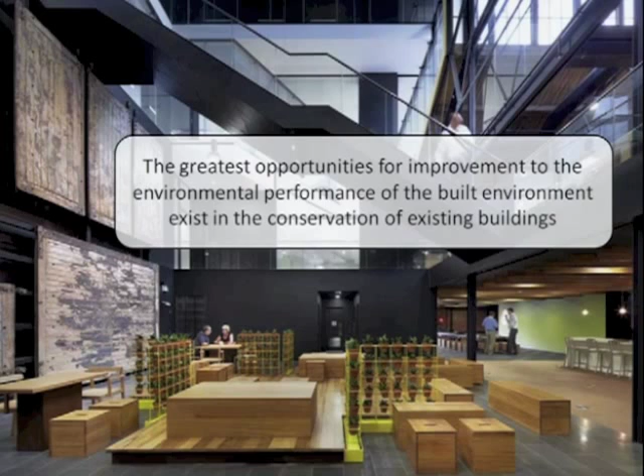One of the key resources embodied in existing buildings is energy - the energy that's gone into manufacturing the materials and systems in our buildings. There's an increasing focus on talking about embodied energy. For those who aren't aware, it's basically the energy required by all the activities associated with manufacturing and processing materials and systems in buildings, as well as the energy that goes into making the equipment required to manufacture materials and all the other services required to get buildings up and usable.

There's an increasing focus and discussion around embodied energy, as many of you will be aware. Even in things like Green Star, there's increasing talk about credits for reductions in embodied energy and so forth. Yet broadly in terms of the industry, it's rarely considered in most of our projects - it's really not discussed or included as a component of design or refurbishment.

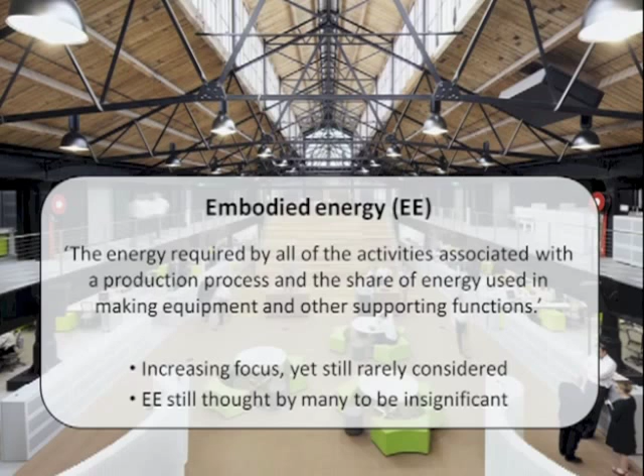One of the reasons for this is because it's considered a fairly insignificant component of the energy associated with a building over its life. Most people suggest it represents maybe 10 to 20% of the total energy required for a building over its life, and therefore we don't tend to focus on it a terrible amount. That's why we focus on improving the operational energy efficiency of our buildings, because we're more aware of that and think it represents a larger proportion of the energy associated with our buildings.

We use a range of different passive and active strategies to deal with efficiency issues and reduce energy consumption in the operation of our buildings. But there are two significant and often unthought about consequences. The first is that by reducing the operational energy requirements of our buildings, we're increasing the proportion of the embodied energy component.

Secondly, the energy efficiency solutions we're integrating into our buildings, like innovative heating and cooling systems, high-performance glazing systems, and increased insulation levels, are actually increasing the amount of materials required in our buildings, and therefore increasing the embodied energy component as well. So there are two things working against us in terms of reducing embodied energy as a result of our current focus on improving operational efficiency.

This might not be a problem if the embodied energy component of our buildings was insignificant or relatively minor. But more and more research is showing that the embodied energy component is actually the most significant component of a building's life cycle energy requirement.

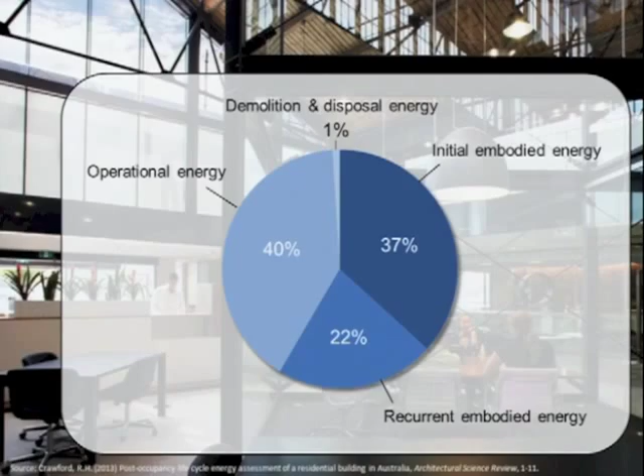So it's an area of significant and increasing interest for us to focus on. Now, there's all this talk about embodied energy as the main focus of conserving our buildings and the reason why we should conserve our existing buildings.

But we need to keep in mind that energy is not the only resource required to construct buildings. There's a whole range of other resources we require - water, other raw materials, and outputs such as waste, pollutants and other emissions like greenhouse emissions. These are all consequences of the construction of buildings, and we need to factor those in and consider them just as importantly as embodied energy - in terms of embodied water, embodied materials, embodied waste and embodied emissions. So there's a significant advantage in conserving our existing buildings because there is such a huge amount of resources embodied in the materials they're made up of.

That is made more clearly obvious by the fact that it is the components of our existing buildings that are most durable and most easily conservable that actually represent the highest proportion of their embodied energy. So the main structure, for example, represents about 40% of the total embodied energy of a building. So if we can even strip a building right back to its main substructure and superstructure, we're still conserving potentially about 40% of its embodied resources.

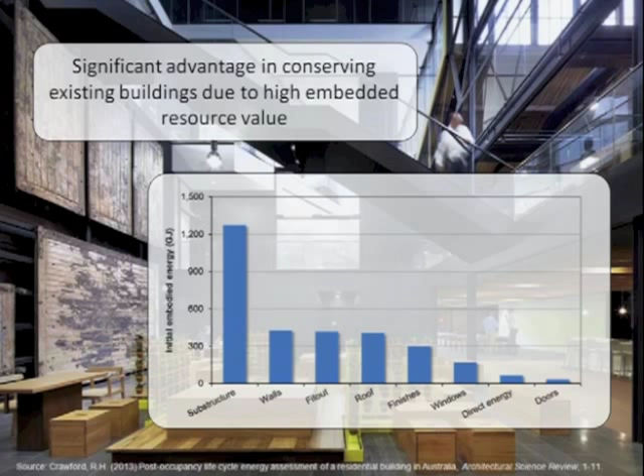So if we're able to conserve all of this energy and all these resources by conserving our existing buildings, we're potentially already saving some embodied resources by not building a new building.

We've got to also consider the fact that there may be particular limitations associated with our existing buildings that mean we're not able to achieve the operational efficiencies that might be possible with a new building, in terms of glazing areas, external materials of existing buildings, and things like that.

And we've got to balance the saving in embodied resources with a potential decrease in operational performance across the life of these buildings. So we need to determine or make sure that there's actually a net benefit being achieved by conserving our buildings. And there won't be a net benefit in every case.

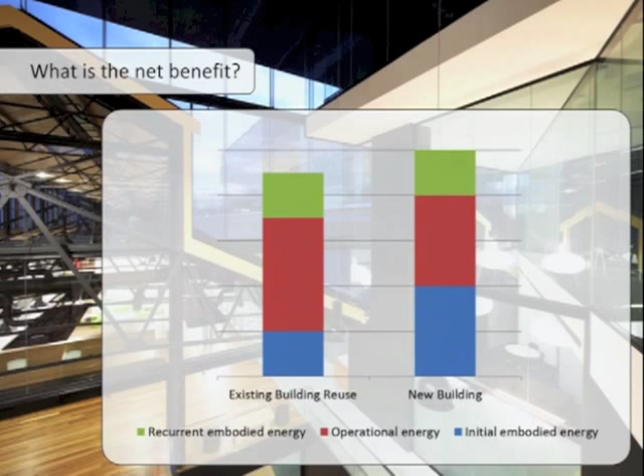We've got accepted approaches for quantifying and modelling the operational performance of our buildings. But the modelling and quantification of the embodied resources of our buildings is much less developed and less understood. So there's a lot more work that needs to be done in that area in particular.

So then how do we go about quantifying these resource savings, potential resource savings from the conservation of our existing buildings? Now that we know they are and they can be significant, the approach that we typically use in the field of life cycle assessment is embodied resource analysis. So if we're quantifying embodied energy, it's embodied energy analysis, or embodied water analysis for water. A general term might be embodied resource analysis.

So we can actually quantify the embodied resources that go into constructing or refurbishing a building. This approach comes under the general framework of life cycle assessment that many of you may have already heard of. The framework is outlined within the International Standards 14040 series, which basically sets out some guidelines for how to conduct a life cycle assessment, or as a streamlined form of life cycle assessment, an embodied resource analysis or embodied energy or water analysis.

These types of analysis are based on material-specific resource coefficients. So, for example, in terms of embodied energy, we will have a quantity of energy that is required to produce a certain amount of material. So, gigajoules of energy are required to produce a cubic metre of concrete. And we can model the embodied resource of a building by determining the quantity of materials in each building.

As a result of that, we get a sum of the total quantity of resources that have gone into manufacturing or producing a building, and also the outputs that are produced as a result of that in terms of waste, in terms of emissions.

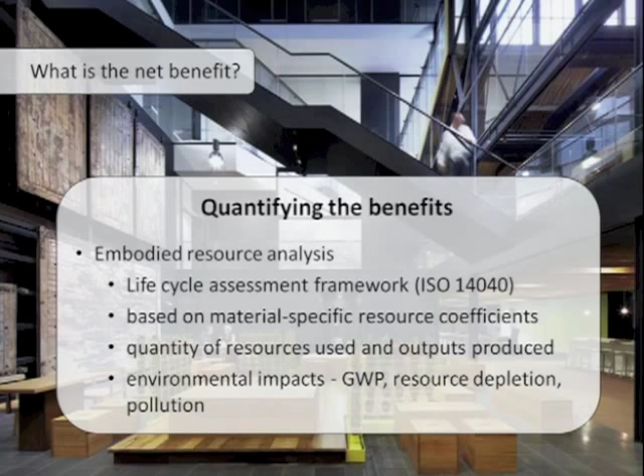And as an aside to that, or a continuation of that, we can then look at the environmental impact associated with that, because energy isn't necessarily energy. Different forms of energy result in different environmental impacts. And we can use this life cycle assessment approach to quantify the global warming potential, or the potential for resource depletion, or other pollution that might result from the construction of our buildings.

Now, the most common, or one way of actually quantifying the potential resource savings from the conservation of existing buildings, is to model the resources that are embodied in those existing buildings.

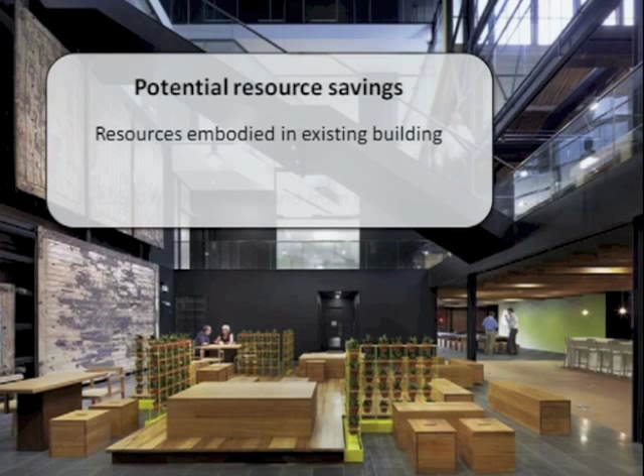Now, the issue with that is that the resources that were required to construct existing buildings, potentially decades or centuries ago, is different than the quantity of resources that would be required to replace that building now, based on newer and different manufacturing processes, more efficient manufacturing processes potentially, different materials and different ways of construction. So that's not the most ideal way of quantifying the potential resource savings associated with conserving our existing buildings.

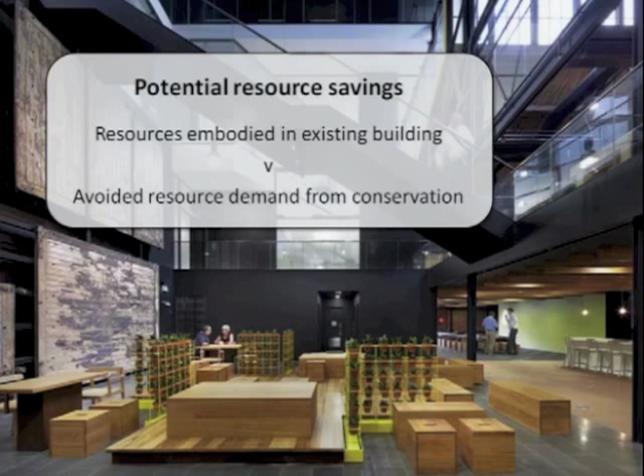The preferred approach is to look at the avoided resources associated with conserving and continuing to use our existing buildings. So what's the resources saved by not having to build a new building compared to keeping the existing one? In order to do that, we need to quantify the embodied resources in an alternative new building for the same function and similar size.

I've just demonstrated how we might do that. From that, we need to subtract any additional embodied resources required to make good the existing building. In most cases there will be upgrades needed for the existing building to bring it in line, not only in terms of physical appearance, but also structural integrity, functional, thermal, health and safety requirements to comply with current expectations and building regulations. So we need to subtract that from the potential resource saving.

There might also be additional operational resources required for an existing building compared to an alternative new building, because of potential limitations on existing buildings in getting their operational efficiency up to what might be possible with a brand new building.

So what I want to focus on now is some of the strategies for and things to think about when we're assessing the embodied resources in a new building, because that's important to understand when we're trying to quantify the savings expected from conserving our existing buildings.

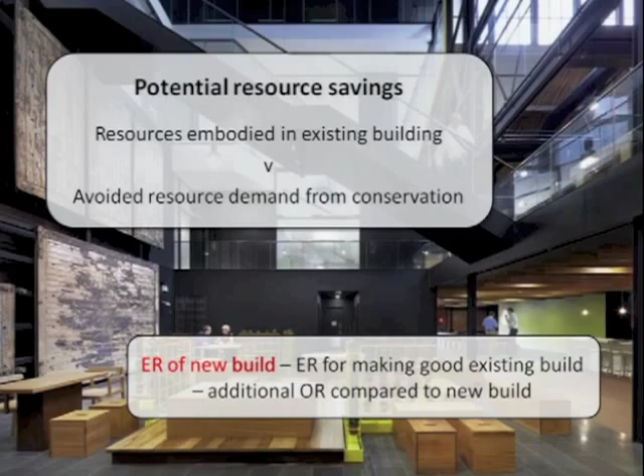Just to give you an idea of some general figures around how much energy is embodied in buildings, we're looking at around 10 to 20 gigajoules per square metre for residential buildings, slightly more for commercial buildings, just because of greater structural and servicing requirements.

Gigajoules doesn't mean a lot to a lot of people. For a typical detached average size house in Australia these days, around 240 square metres, we're looking at around 4,000 gigajoules of energy for one house. That's about the energy content of 500 barrels of oil, or the amount of fuel required to drive around Australia 35 times. So a significant amount of energy in one house.

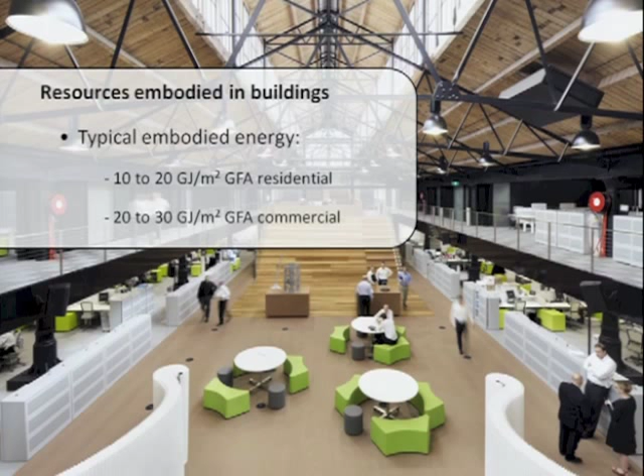We can also look at the embodied water of our buildings. From a residential point of view, you're looking at around 15 kilolitres of water per square metre on average. For commercial, a bit more again, for the reasons mentioned before. To give you a better idea, you'd need to fill a building up between 5 to 10 times with water to equate to the embodied water in that building, before we even get to using the building and consuming water for operational purposes.

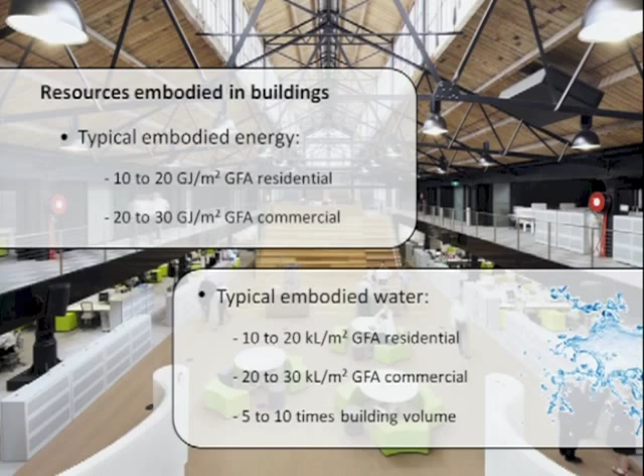There are some general rules of thumb we can think about when quantifying or assessing the embodied resources in our buildings, and also looking at strategies for minimising those resources. As I mentioned before, the building structure typically represents about 40% of the total embodied resources. The construction process itself is typically less than 5% of the total. So trying to minimise energy consumption on site in terms of power tools, cranes and so on has little impact on the total embodied resource requirement.

Road transportation is about 4 times more emissions intensive than shipping. So in some cases it may actually be more worthwhile environmentally to import materials from overseas than obtain them locally, depending on travel distances. However, transportation requirements associated with the embodied resource content of buildings are typically less than 5% of the total overall resource requirement, so it's not a significant area to focus on.

Reusing and recycling materials is also a good strategy for minimising the embodied resource content of buildings. You can save up to about 95% of the embodied resources associated with construction if you're reusing materials, and 90% with recycling materials, depending on the extent of making good and the source of those materials in terms of transportation energy required.

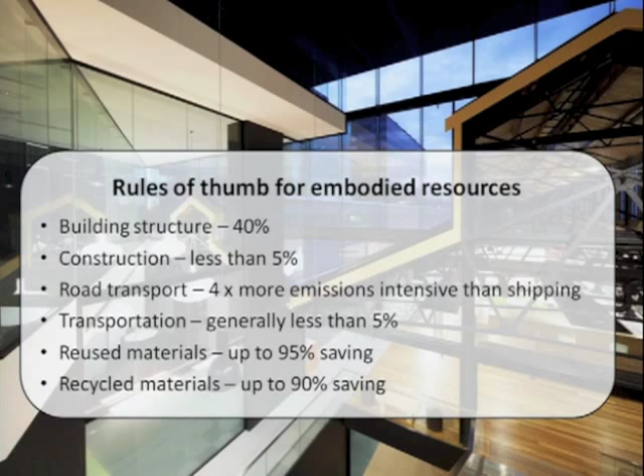So we're developing a greater understanding of the embodied resources in buildings, how to quantify them and how to minimise them. But there are still major challenges remaining. One of the major challenges is data, both in terms of access and quality. It's extremely difficult to get access to quality data because manufacturers are often reluctant to release it for various reasons. By the time we get access to it, data is often out of date and potentially decades old, which doesn't necessarily relate to current practice and current production techniques for materials.

The reliability and completeness of data is also an issue, particularly where we are not able to capture all of the resource requirements associated with manufacturing particular materials, because it's too time-consuming and too complex. So we tend to limit the scope of that data collection exercise to what we think is the most important processes in manufacturing particular materials.

The geographic relevance is also a really critical one. Most of the tools available in Australia at the moment for quantifying embodied resources rely on overseas data. That overseas data doesn't necessarily reflect Australian production techniques and processes and the resource requirements associated with Australian produced materials.

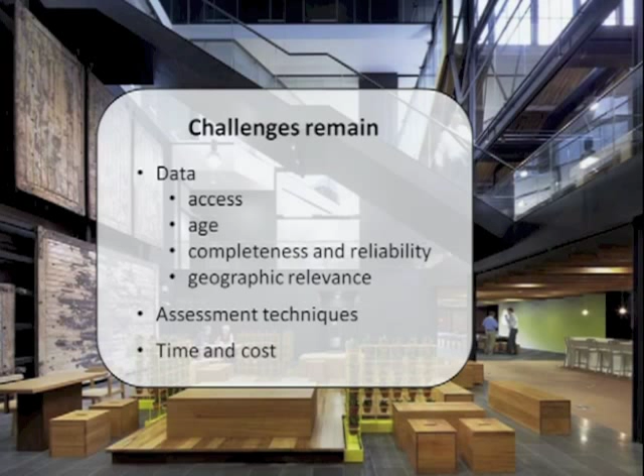There are issues with assessment techniques in terms of their complexity, but also their limitations, and many of them are actually flawed - I won't go into that in detail at the moment. And the time and cost involved is also substantial in a lot of cases. It can be extremely time-consuming to conduct a full LCA or a full embodied resource analysis of a whole building, and because of that can be quite costly. It can take months and months to do that, and it's not something that's going to be done on every single project.

So in summary, what I've hopefully got across to you today is that the embodied resource value in our buildings is significant, and a lot more significant than most of you probably already thought. So therefore, maximising the value of these embodied resources is absolutely critical in terms of conserving and protecting the environment and reducing the resource requirements that we have from the environment.

We also need to take a whole-of-life approach, because it's no longer acceptable, and it's often misleading, to focus on one aspect of a building's life cycle, such as the operational performance of a building. We need to factor in the embodied energy associated with buildings, but also the ongoing embodied energy associated with replacing materials over their life. Sometimes it might not actually be beneficial to conserve our buildings, particularly if there are significant operational efficiency reductions associated with those buildings, and not a substantial reduction in embodied resource requirements because of the conservation of that building.

This seminar is focused on heritage buildings, but I think the bigger discussion is around existing buildings, because heritage, particularly heritage listed buildings, represent only a small proportion of our building stock. And in a way, heritage listed buildings are much easier to deal with, because we're limited and often restricted in terms of keeping them as they are. So it's not as complex and difficult a decision to make as it is with all of our other existing buildings, where the decision to pull them down can come a lot easier, as a lot less controversial decision in a lot of cases.

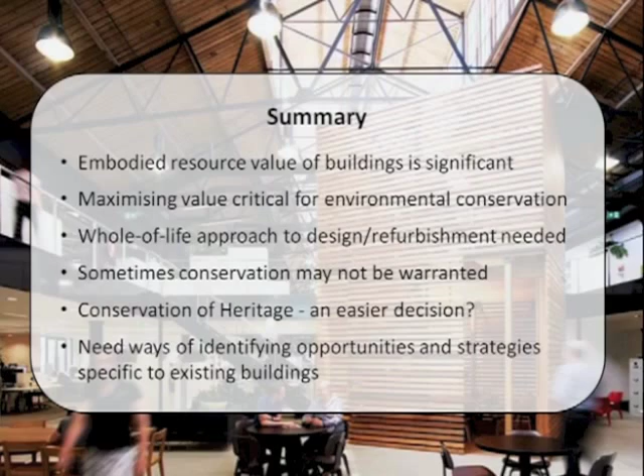So our next speaker is Noy Hildebrand. Noy is editor of the Australian Institute of Architects Environment Design Guide. She's a registered architect in the United States and a sustainability consultant trained in a range of systems: the Living Building Challenge, the Bioregional One Planet Sustainability, LEED and Green Star. Noy has worked on medium and large buildings in Australia and abroad, and her areas of expertise include high-performance building design and the interaction of facades with natural ventilation. Noy's topic today is heritage buildings and environmental response.

Good morning. Thank you for inviting me here today, Robert. And it's funny that I go after you, because my talk actually has to do with operational energy and the unique characteristics of heritage buildings.

So yes, as Justine said, I edit the Environment Design Guide. EDGE is an online publication of the Australian Institute of Architects. EDGE has over 200 peer-reviewed design notes, which cover various aspects of sustainability in the built environment. And while some of the material can be a bit technical and theoretical, the target audience is primarily architects and designers of the built environment.

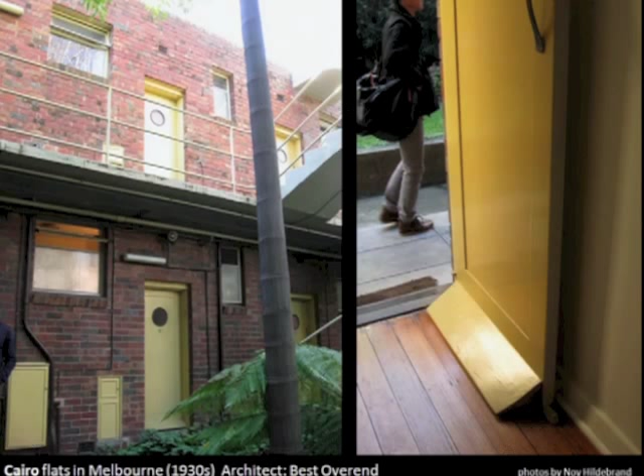So after I put these slides together, I realized I didn't bring the prettiest images of Cairo Flats, but oh well. So this is Cairo Flats in Melbourne, designed and built in the 1930s by Best Overend.

These minimum flats with maximum comfort have very interesting openings that face the cantilevered corridors, which are those on the left. The front door of the apartments has a splash guard detail, probably designed to keep rain out and away from the door sill.

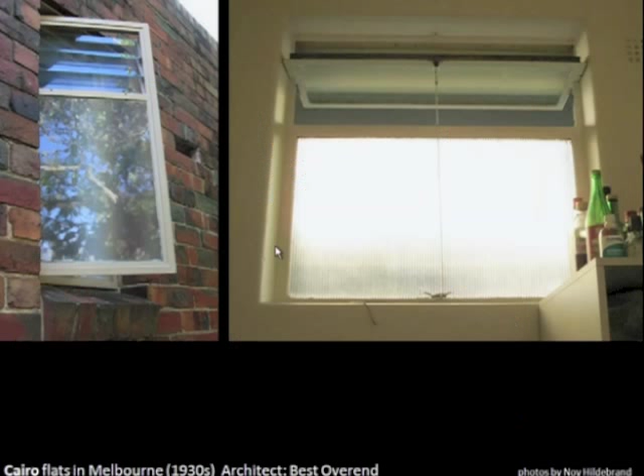The next are the bathroom and kitchen windows—this is the kitchen window, and this is the bathroom window. They're both elevated so as to assist with privacy and security concerns.

The bathroom window has a lower part of the sash which allows for daylight but obscures view for privacy, while the upper glazed louvers allow a view of the sky and a moderate level of exhaust. The whole thing is mounted on a casement window sash, which can fully open for an even higher level of exhaust.

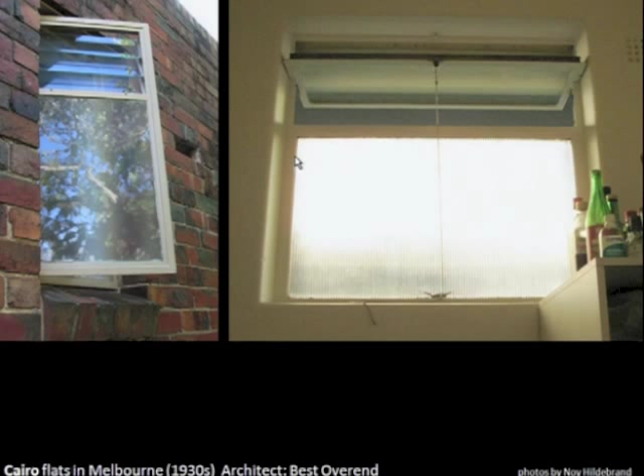The next one is a kitchen window, which again has that obscured pane with the upper level open for exhaust and, in some cases, for views out.

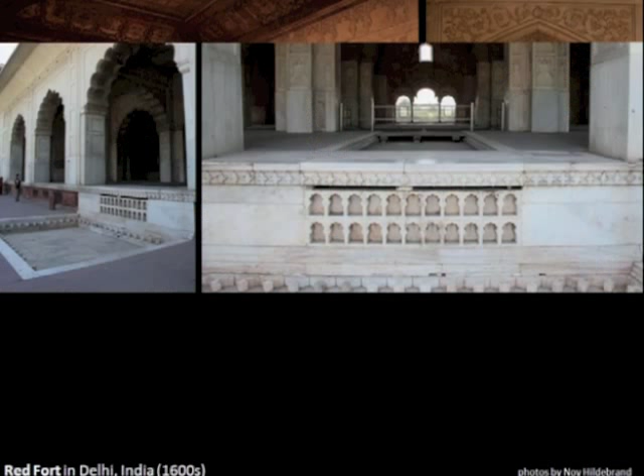This next example is Red Fort in Delhi, India, which is in some ways very similar to Agra Fort. It also has screen walls in some locations, but in addition, the breezeways that the screen walls allow for are coupled with shallow pools and a waterfall, which help with evaporative cooling in the hot, dry climate.

It's worth noting that the carved screens and the water features are integrated into the architecture. They provide pleasant aesthetic and a cooling function for these places.

The final case study is the dome building at the State Library of Victoria from 1909 to 1913, by Bates, Peebles, and Smart. As with buildings of this era, the dome reading room was designed and built at a time when architects designed buildings to harvest daylight and naturally ventilate.

For this talk, I'll be focusing on the dome reading room in terms of daylight. How the light was brought in to be usable was a skill characteristic to the culture of architectural practice at that time. In much of the world, electricity was not always consistently available, as it seems to be in our own time, and daylight was a key reliable resource.

Combustion-based lamps were available, but they create fumes, and fire and books don't really go together. This influenced how architects designed buildings and spaces. They had to make a concerted effort to light spaces for working, for reading, and for visual legibility.

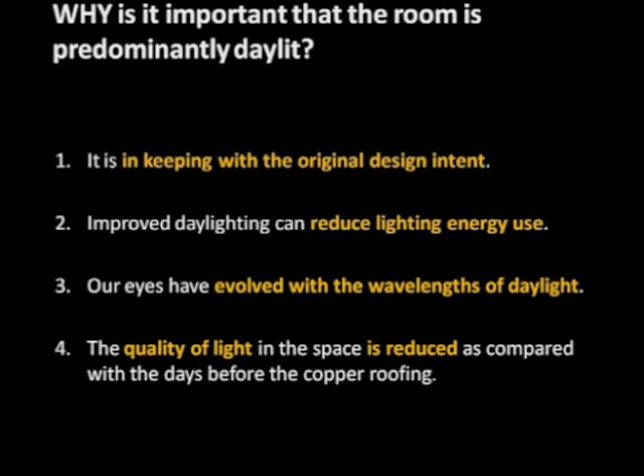The ground in the space feels somehow less connected to the sky. The occupant seems less connected to the outside world. It's harder to sense where the sun is and what the sky is doing. The architectural space is performing more like any other big room that happens to have a skylight.

This is not to say that the reading room should necessarily revert back to its 1913 lighting schedule. Electric lighting has its place, such as during heavily overcast skies, and at night, of course. The room with a skylight is no doubt a huge improvement to the room without, but if we truly value natural light, as we say we do, why do we persist in competing with it rather than working with it?

I, for one, hope for a less energy-hungry dome reading room one day, where the daylight is sufficient for ambient illumination and reading, when conditions permit, and where electric lighting can be used when needed or desired, rather than by default as it is now.

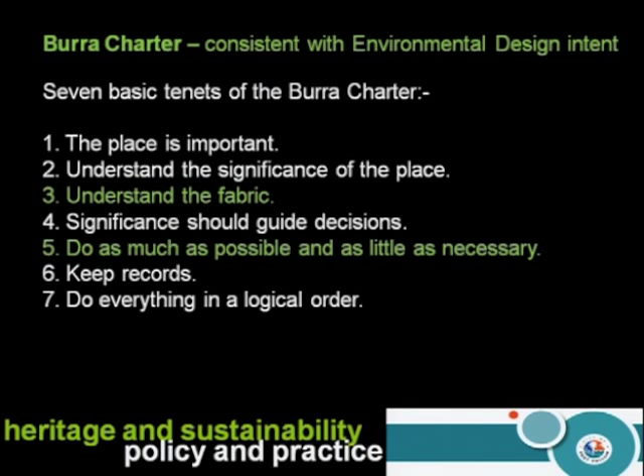Just giving you some background as to Port Phillip's approach and where we have aimed and are aiming to get to, and that will constantly be being looked at.

To give you some context of Port Phillip itself, a very large amount of the municipality is covered by heritage overlay, and therefore this issue is a definitive one in terms of certainly my experience in working with applicants and their designers.

Council itself appreciates the need to address both of these, and has certainly in the last 10 or so years made a very strong commitment to working towards sustainable outcomes from the built environment.

Council now have started off with 2 dedicated advisors, and I work with a sustainable colleague in how we assess applications in this field.

The urban design and sustainability issues within the department have grown over time, and that sustainability team, which was quite small about 10 to 12 years ago, now consists of 17 staff, across the whole sustainability area - so I'm talking about sustainable transport planners as well.

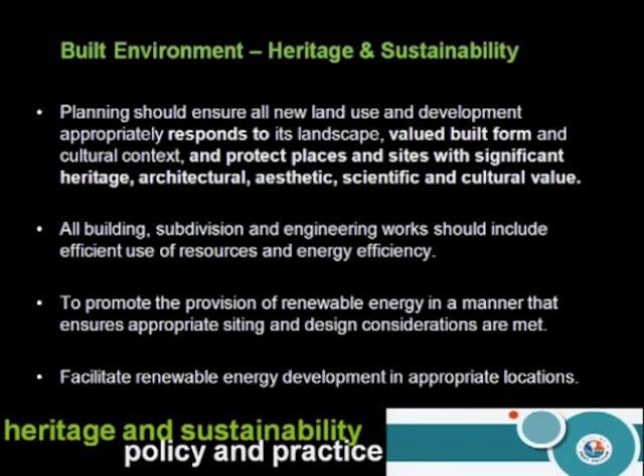I'll quickly go through some of these five key issues within our heritage guidelines, and towards the end I'll show you some of the work we're seeking to get out to the community.

Just touching quickly on the built envelope and how we take advantage of solar access, building fabric, and some of these elements within the heritage fabric that we clearly need to address - we've heard some of the benefits of these elements, i.e. windows, the performance of the glazing.

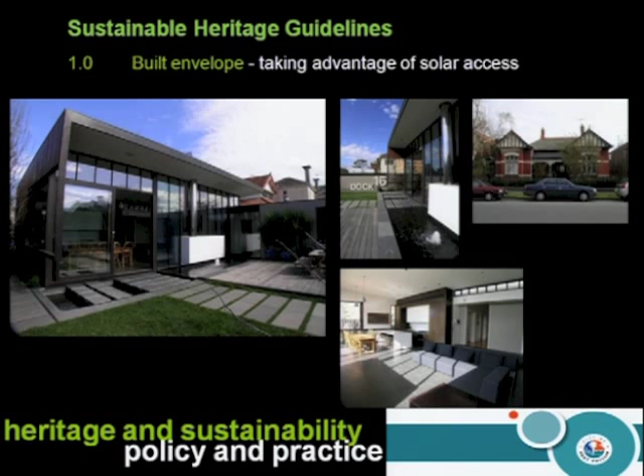So yes, it's an example of the heritage fabric within Port Phillip, illustrating how you can retain that heritage character and accommodate new accommodation to the rear of the dwelling, maximising on a number of those sustainable issues - in this case, taking advantage of the solar access, and again, use of building fabric.

The Tolarno Hotel, renovated not so long ago in Fitzroy Street, again shows the use of retaining built fabric, but bringing it up to today's standards while equally hitting some of those sustainable benchmarks.

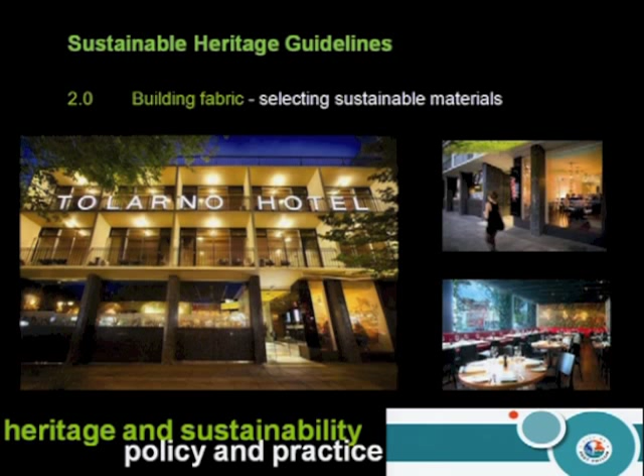Windows, and we've talked about performance of glazing. There are other things within the streetscape that can also assist, such as verandas. They're all something that needs to be assessed in that fashion.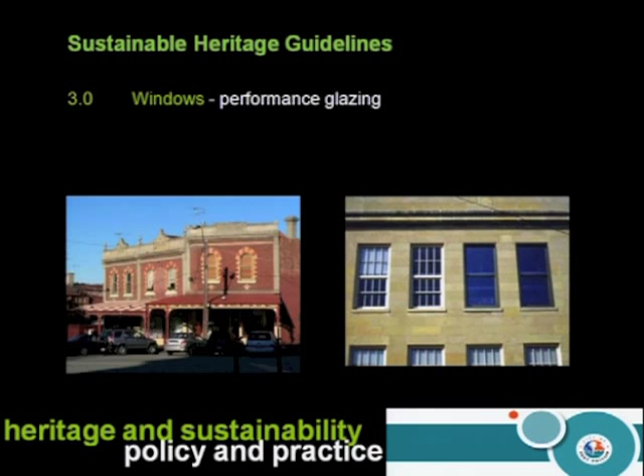Moving on, here's the example of verandas and window restoration. Most recently, I had an application where they were happy to retain the windows, but it wasn't a veranda as elaborate as this, and they actually wanted to remove it. Ironically, there was this concern that they weren't getting enough daylight, and it really was about looking at how you could retain the veranda but improve the lighting within the building.

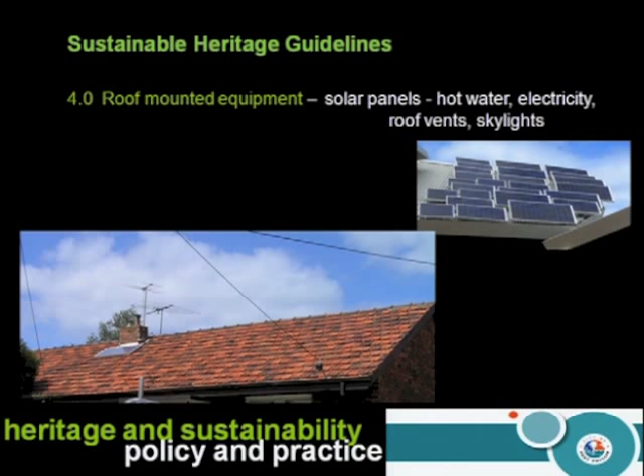The one I'll touch on very briefly later, but very soon, is this issue of solar panels. Clearly this is one of Port Phillip's greatest percentage of applications - solar panels that we're receiving a number of applications for, but on a lot of heritage buildings within the municipality.

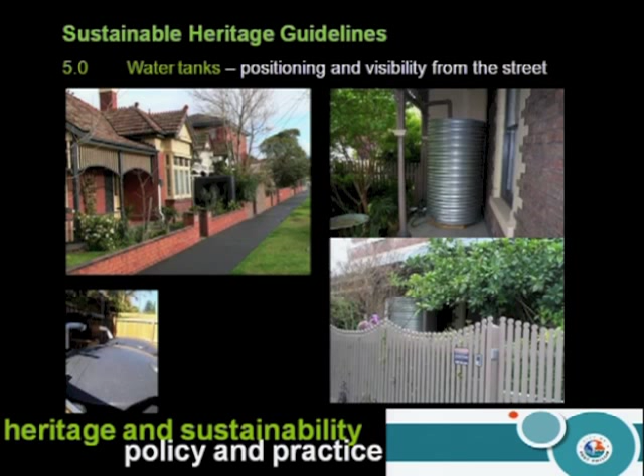I probably should have swapped these two slides around, but then, as I mentioned earlier, water tanks. The issue here was actually siting of the water tank. Some properties are just difficult to screen or hide them, particularly a corner property. The example here was where they actually wanted to stick it right on the veranda or in the front garden, and we worked with them to find a better location.

Now, just quickly, I'll illustrate the case study within Garden City Estate, Port Melbourne, a listed estate, one of Melbourne's first historic estates, public housing of significant importance in Victoria's history. Given the layout and design of the practice at the time, it's one that was really important to protect and conserve. Part of the design element or characteristic is hipped roofs and gabled roofs with terracotta tiling, those being key to that fabric.

But then how do you address a resident who wants to put solar panels on a house in an estate of such importance? Again, it's an issue of orientation - not all roof slopes face the sun, and the sun moves. So, quite frankly, it is difficult. But again, with assessment and this ongoing discussion, it can be achieved.

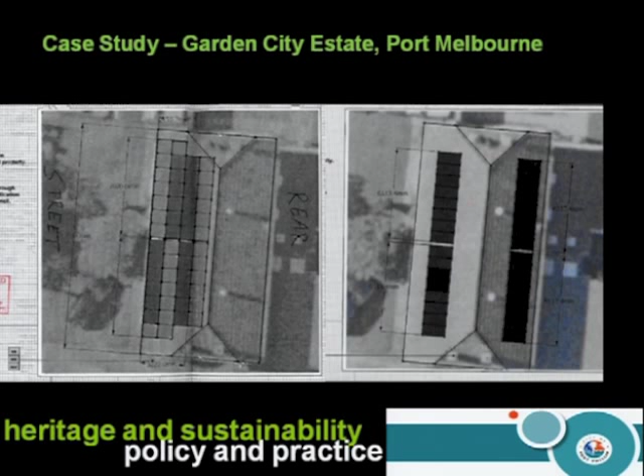So we worked with the applicant to look at another system, and ironically, by the time this application came in, while we were having this discussion, this particular manufacturer stopped making this type of panel. So the applicant had to find another manufacturer. The other manufacturer came up with a slightly different panel, less in quantity, and even addressed in his assessment the need in this case to put it on both slopes of the roof, illustrated on the right hand side.

Now, council - and then the last iteration, which came in a third time, had actually gone from a bit less to now a bit more, but not as much as before. So it was going all over the place.

Having said that, what we, with our sustainable development team, sought to address with this particular applicant was other ways of improving energy efficiency in the home. He saw solar panels as the sole factor for him in addressing energy. We said there are a number of other things you could do, and we'll work with you to achieve that, and therefore minimise the amount of panels you may need, and place them in more suitable locations that would address the heritage policy as well.

Sadly, he didn't take that on board. He never got refused his application, but he had a condition which meant he couldn't put it on the street-facing roof slope. He took us to VCAT and argued that a panel should be seen similarly to a TV aerial, which VCAT, the member decided, no - unless the planning scheme puts solar panels in the same list as satellite dishes and TV aerials, he wasn't going to entertain that argument. So subsequently, he got a permit for solar panels, but just not as many, and in the location proposed. He's now seeking to take us to a higher court on human rights issues.

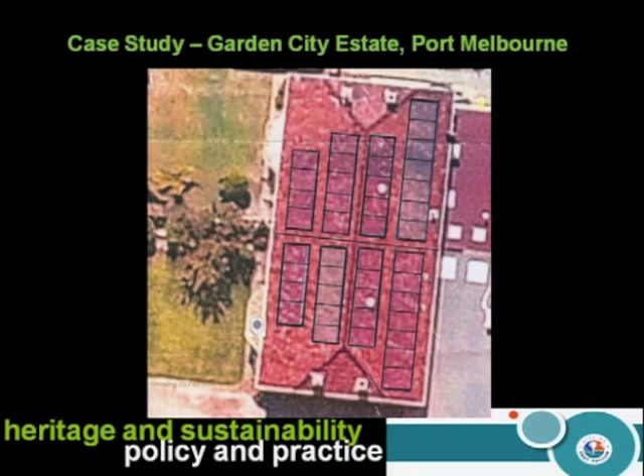That's something we could talk about later if you like. Having said that, it's important to place these things in appropriate locations. It's not to say they cannot or should not be visible from the street. It's really about how you minimise the impacts.

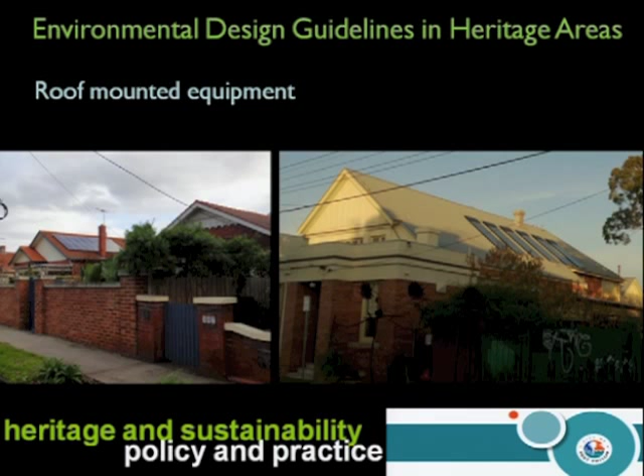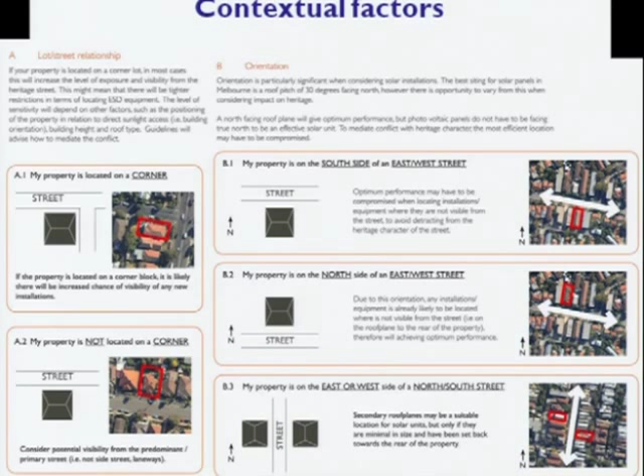Just to quickly illustrate the sort of guidance that we're seeking to produce for the general public and the community, just to have that conversation as to where the best location might be. I've just illustrated the one for solar panels. We have a range of these fact sheets dealing with a number of those other elements that I illustrated earlier.

We also produce a number of fact sheets to do with SDAPP, and we've been working in the IMAP Council, which is Melbourne's inner urban councils, to come up with guidance that is relevant to all councils. After all, council boundaries are just lines on a map, but our urban environment and inner urban Melbourne is seen as one significant part of Melbourne and Victoria's heritage.

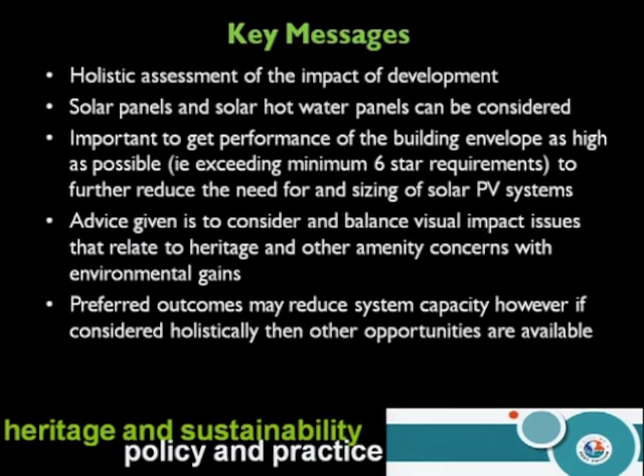He's Professor of Construction and Facilities Management at the Institute of Sustainable Development and Architecture at Bond University. Craig's work spans issues of sustainable development, building adaptation, multi-criteria decision-making, one of the topics of Leon's talk, and construction performance. He's the author of 5 books and has completed 4 ARC-funded research projects. Craig's topic today is Green Adaptive Reuse, Enviro Heritage. So, please welcome Craig.

Well, good morning, everyone. I'm Craig, and I'm from Queensland. As you can probably gather, I've got the sunglasses and the jumper coming down to Melbourne, so I should get rid of all of these things, and I'll try and be a Melbourneite for just a few minutes. I don't, but I'm thinking you might.

My talk, as Justine mentioned, is on green adaptive reuse, which many of you might say, well, isn't all adaptive reuse green? And I think the answer is yes. But the intention in my talk is really about how we can improve work on existing buildings and heritage-listed buildings by incorporating environmental performance as part of that adaptation. So green adaptive reuse is a term I've coined to highlight the fact that environmental performance and adaptive reuse are not mutually exclusive.

So I did a little analysis on the LEED directory of projects that have been certified as platinum in the US. Platinum is really the equivalent of our Green Star 6-star in Australia. And what I found, a little bit to my surprise, was that only 5% of projects that have been approved as platinum are adaptive reuse projects. The remainder are either renovations to projects that are the same function or, in fact, new buildings.

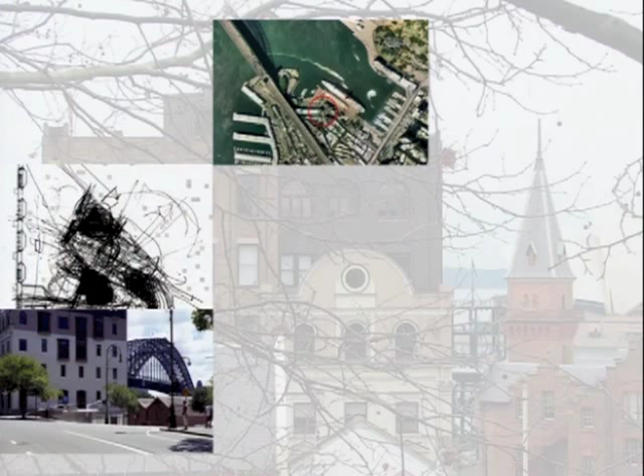So here are some photographs of the building from the architect's website, and you can see instantly that the building is in a very good location. It has views of the Opera House in Sydney and the Harbour Bridge. It sits pretty much on the foreshore of Sydney Harbour. It has beautiful windows and fenestrations to the views, capturing natural light and natural ventilation opportunities, etc. And as Robert pointed out in his talk earlier, there's a lot to be gained from adaptive reuse when we look at existing buildings over new buildings, and this would be a great example of that as well.

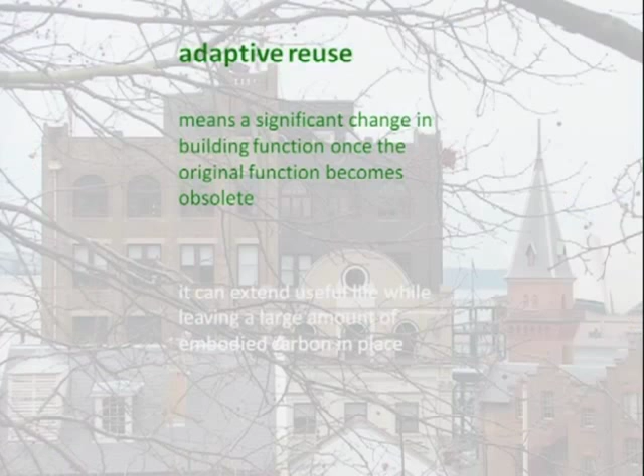So adaptive reuse means a significant change in function. That's its definition. So what we're looking at is taking an industrial building and converting it to an office building or some other, quite different function from what it started as. It can extend the useful life of the building when that happens, assuming the existing function had become obsolete. Rather than knock the building down or leave it derelict if it's protected and no one wants it, it's about how we can give it new life through a change in function.

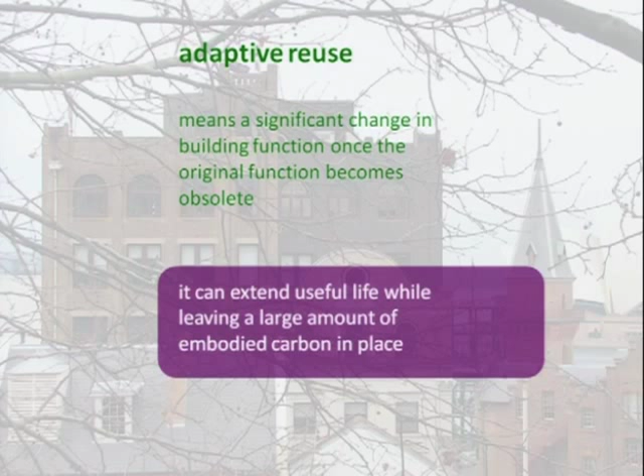So I've been working on a number of models over the years, and I'm going to talk about three of them briefly today. The first one is called the ARP model, or Adaptive Reuse Potential Model. What it does is it ranks the potential for adaptive reuse in existing buildings and identifies the optimum time when you should intervene to change function.

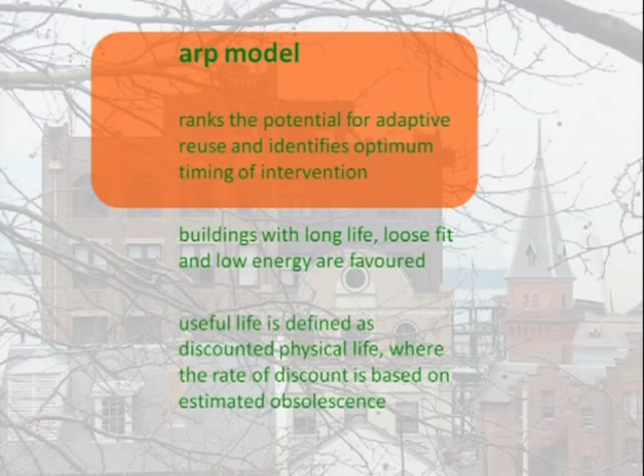It works on a principle which a lot of you, I'm sure, would be aware of, that buildings should have long life, loose fit and low energy as principles of their design. And the way the model works, useful life is defined as discounted physical life, much like a discounted cash flow might convert money from one point in time to another. And it uses an estimated rate of obsolescence as the discount rate.

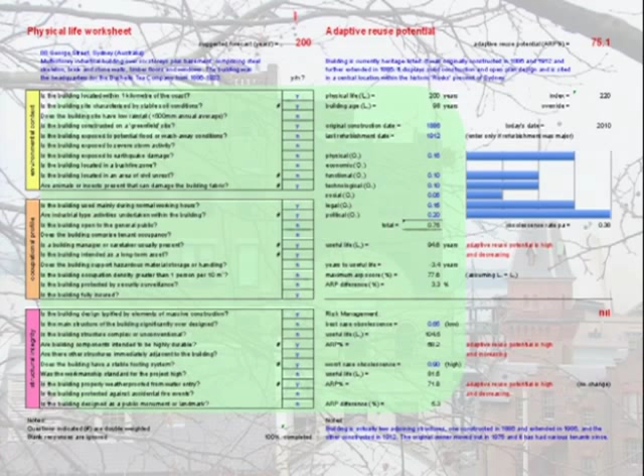Okay, just draw your attention to the fact that it forecasts the life of the building in this model, and the answer it comes up with is 200 years of life. This study was done when it was just around 120-odd years of life, so it had potentially 40% of its life left. And that's worked out on a simple, well, not so simple actually, it's a bit of expertise built into what looks like a simple calculation where you answer yes or no to a series of questions and it tells you the answer.

I'd have to spend a bit more time than I have to explain how that works. But nevertheless, once you have that, it then calculates an obsolescence rate, which comes from these areas here. So there are 7 obsolescence categories, which are scored. And it comes up with an adaptive reuse potential score, in this case 75.1.

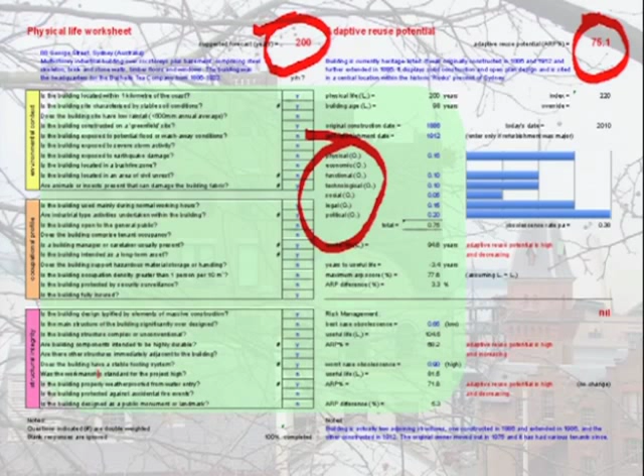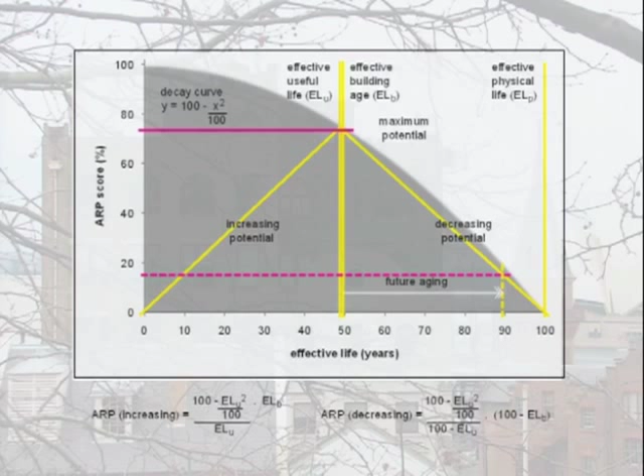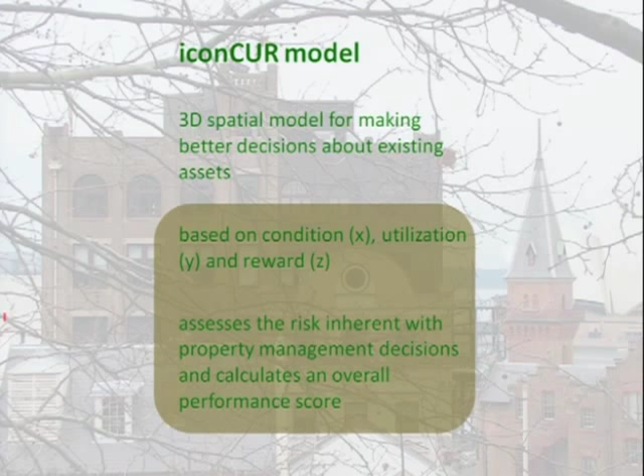The second model I want to talk about is called iconCUR, and I've worked with an excellent group of people, including Robert Crawford, on this project over the last 3 or 4 years. We've just finished our conclusions in the last few months. iconCUR is a 3D model, like a cube, with X, Y and Z axes. X means the condition of the building, Y means the utilisation of the space within the building, and Z means the reward, triple bottom line reward that comes from the building upon its completion. This model is useful for judging and comparing different choices in adapting existing buildings. It's just another seemingly simple spreadsheet model, but a little bit going on in the background.

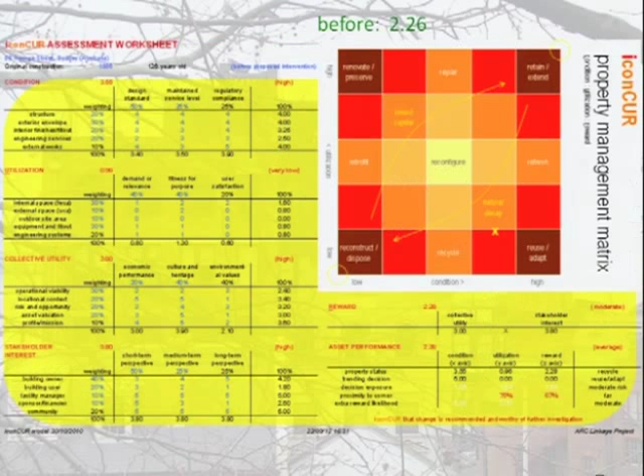If you notice the graphic in the top right-hand corner, this is the base of the cube, and it shows 4 corners. One is to reconstruct or dispose of your asset. Another is to renovate and preserve, retain and extend, and another is to reuse and adapt. On this particular project, the X shown here is the position of the coordinates after it was assessed, before the intervention. The distance of that point to the nearest corner tells you what you should do. In this case, it was saying this building is suitable for reuse. The actual distance of that X to that corner can be measured and used to rank various projects in terms of which has more potential for that action than others.

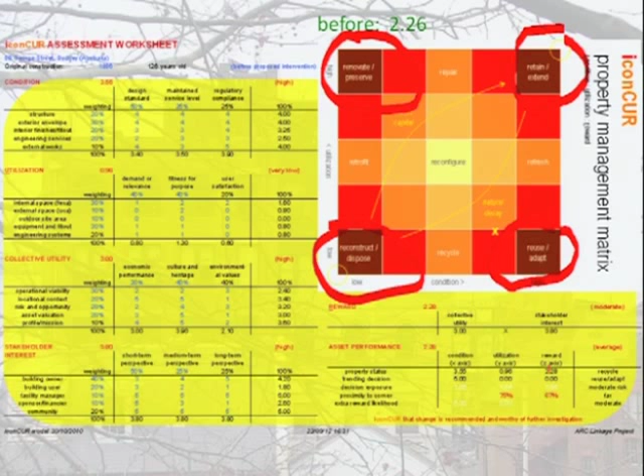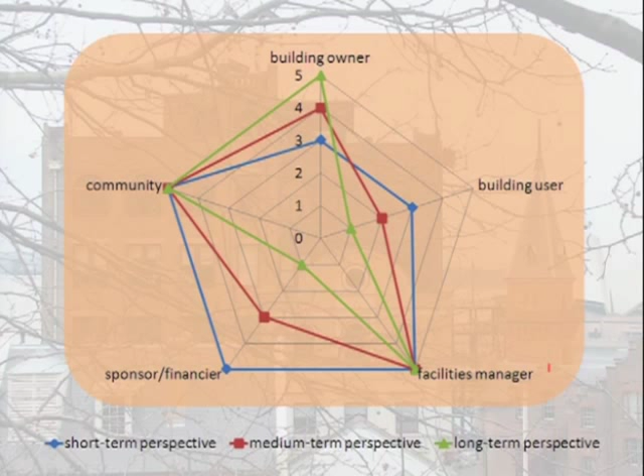We can also look at things like the various stakeholders involved in the project and whether they have short-term, medium-term, or long-term interests. There's a lot of analysis that can come from this model by digging down and thinking about it further. After the intervention, the calculation was repeated, and you can see that the X moved closer to the retain, extend corner of the model, which indicates we've made this asset something we want to keep, whereas before it was perhaps something that needed work. The score went up, I think, from 2 point something to 3.32 as a result of that.

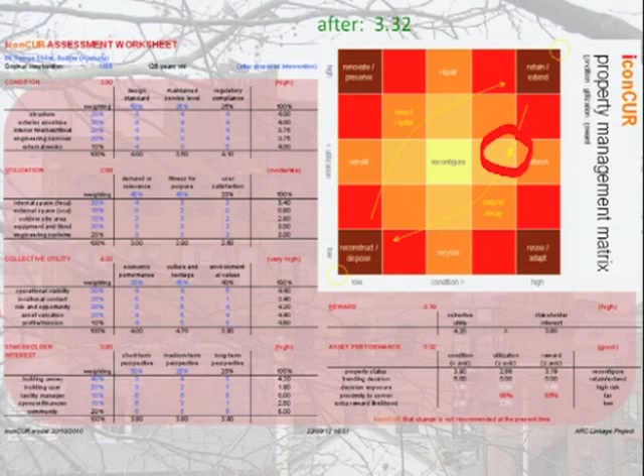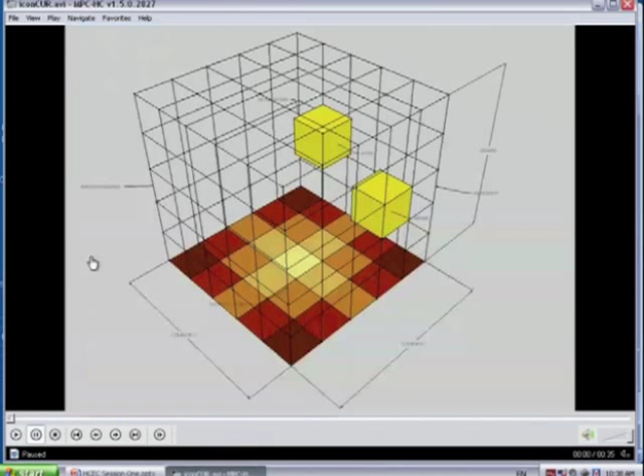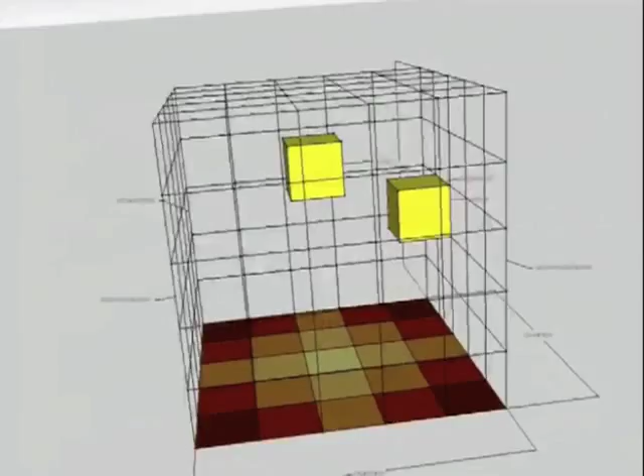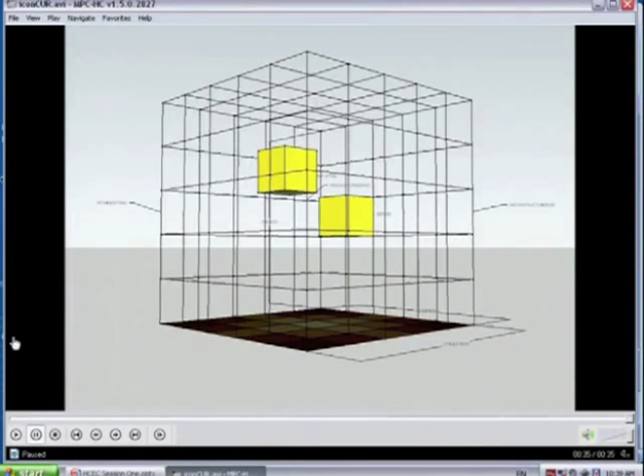This slide is a little video of the iconCUR model. It's a 3D model, 5 by 5 by 5 cube, and you can see 2 large dots in the model, one the before and one the after. As a result of the intervention, adaptive reuse, the project improved its status and moved higher towards the retain, extend side of the cube. The higher up in the cube, the more valuable the project has become. So you'd want to make sure that after your intervention, what you're left with is higher in altitude in the cube than what you started with, and also that it's closer to the correct corner to maintain and keep. Thank you very much.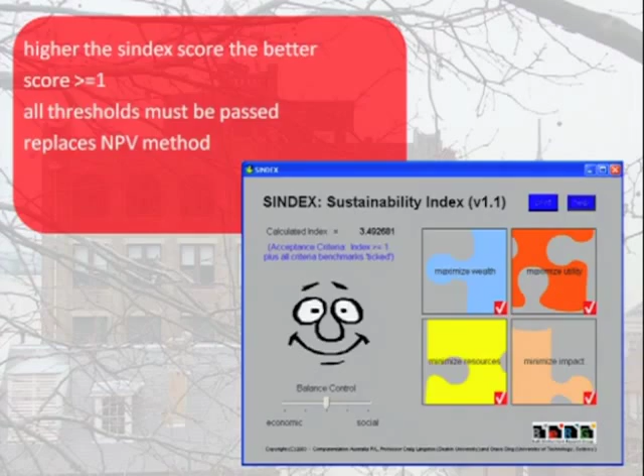This case study, although I haven't had a lot of time to talk about it, was full of a number of environmental performance initiatives, and that earned it a 5-star Green Star rating, the first in Australia to get that level rating. So it's about as green as a heritage building - well, it was as green as anything in 2010, never been done before in this country. So that's what I mean by green adaptive reuse, not just adaptive reuse, but environmentally superior adaptive reuse.

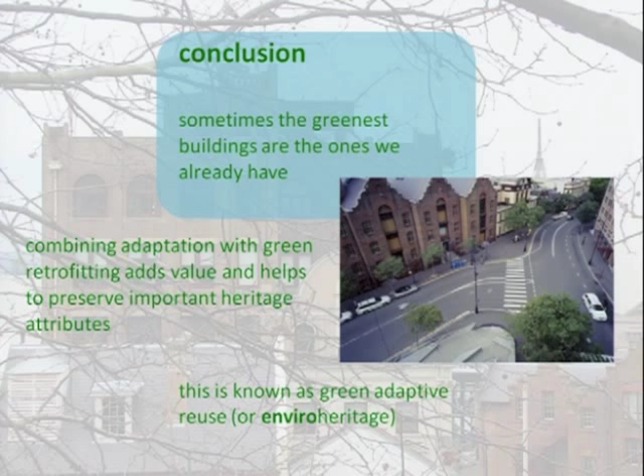So this presentation has demonstrated that adaptive reuse and exemplar environmental performance are not mutually exclusive. They're still rare, but they can happen. And ensuring heritage-listed projects are fairly treated by green rating tools, such as Green Star or LEED, probably requires further inquiry - it's not something I'm really capable of doing. But experts in how the rating tools work might need to look and see whether they're biasing towards new construction. I suspect that they are on the percentages, but how you fix that is someone else's problem.

There are several other heritage buildings now that have been awarded 5- and 6-star ratings by Green Building Council of Australia. I think Evelyn is going to talk about one of those after morning tea, is that right? The Goods Shed North is a 5-star Green Star building, first in Victoria for heritage.

And in Sydney, for those of you a little bit aware of outside Victoria, there's 39 Hunter Street, which is a 6-star heritage building - well, 6-star Green Star heritage listed reuse. Well, it's an adaptation - I wouldn't call it an adaptive reuse because it was an office building and it still is an office building, but it's close enough. So let's say that's a 6-star.